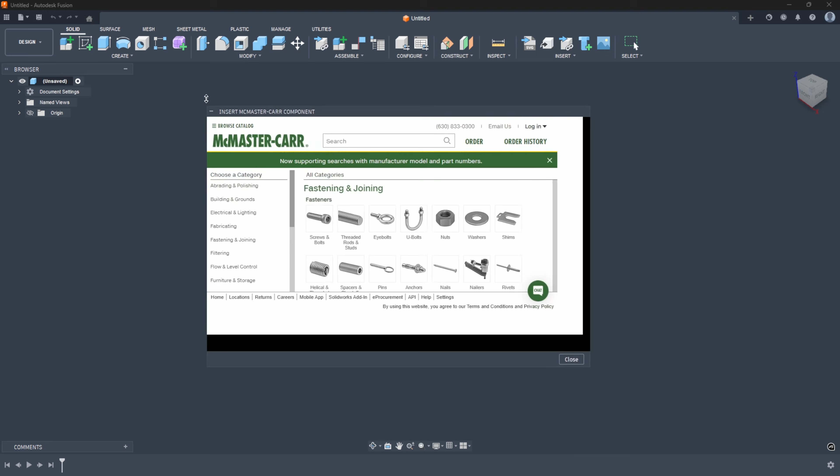I'll make this a little bit larger and do a search for 80/20. Let's do the double framing rail, and let's do a 3-inch rail height. Now as I scroll down, I'm just going to pick this first one here, this hollow example. I only need one of them.

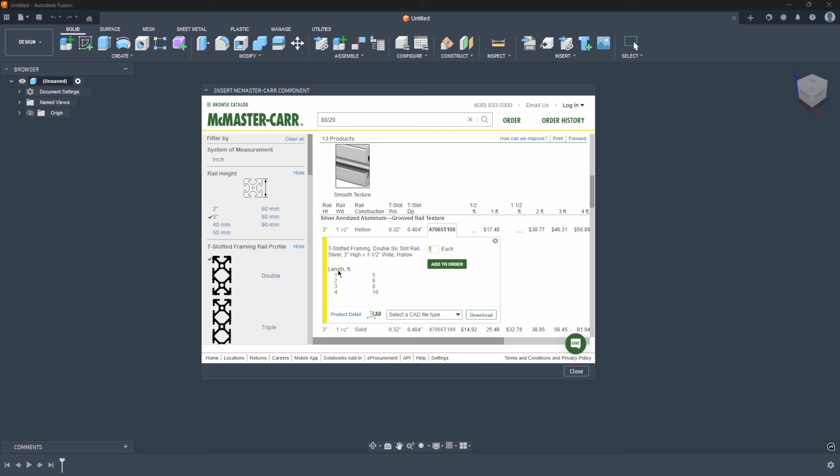Now you'll notice it's asking for a length. I'm going to scroll down a little bit, select a CAD file type, and it says please specify a length to download the CAD file. It only gives me different lengths in feet, and the shortest one is 1 foot, so I'm going to select 1 foot. I like to use 3D Step, and I'll say download.

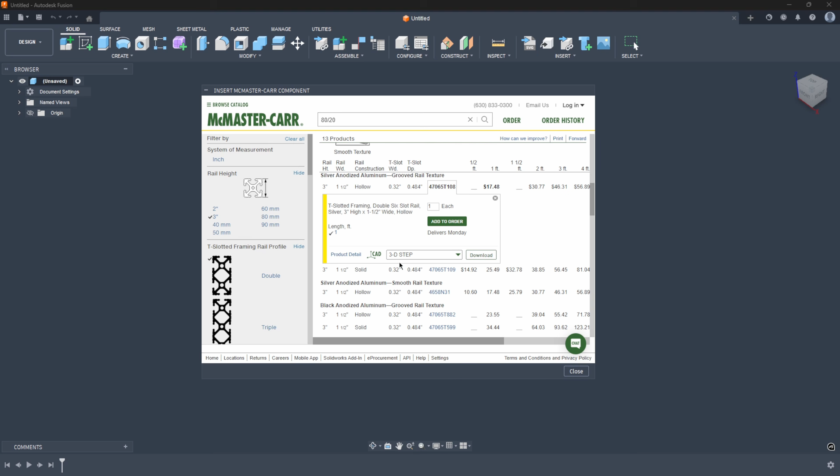I just got the 80/20 aluminum extrusion brought right into Fusion. I'll turn off ground to parent, I don't need that for now. I'll say OK, and if I click on one of these edges, we can verify that sure enough it is 12 inches in length.

Now, what if I wanted this to be a different length, some random length like 22.5 inches, which obviously was not an option in the McMaster-Carr dialog.

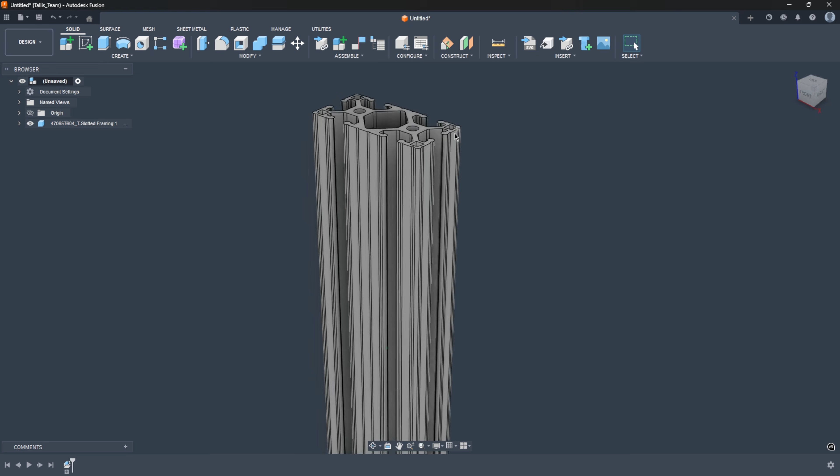Well, I'm going to click this top face here and say press pull. Or I could come under modify and say offset face - it's going to give me the exact same result. If I say press pull, you'll notice it says offset face.

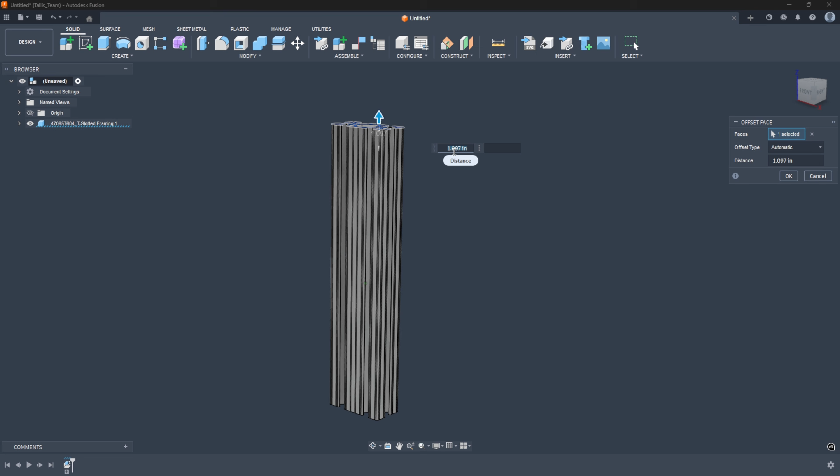Now if I start to drag, you'll notice it's giving me this number. It's kind of hard to see, but you'll see this white arrow, showing that it's moved just over an inch from where this arrow tip is. So this is where the blue face originally was, and we've offset it just over an inch.

Well, there's a cool little option where these 3 little dots are right here. If I click on these 3 little dots, there's a command in here called re-anchor. So I'm going to click on re-anchor.

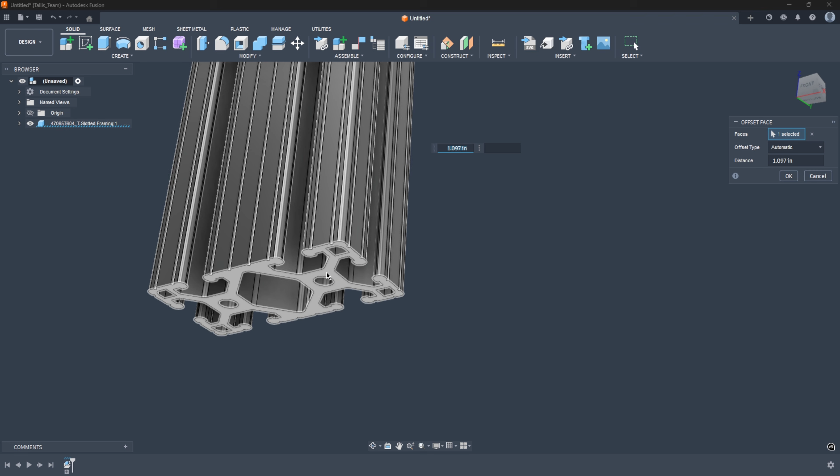And then I'm going to pick the bottom face of this extrusion. You'll notice it says select perpendicular face for re-anchoring. So I'm going to click that face, and now this number, instead of being 1, it's like 13. The arrowhead is now pointing to that bottom face, so it's measuring from the bottom of the part, and now the top blue face is 13 inches from the bottom.

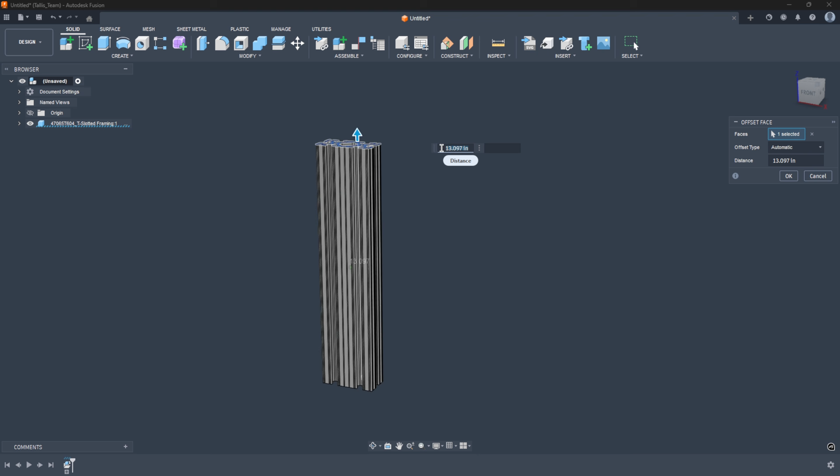So now I could type in, for example, I'm going to zoom out just a little bit, I could say 22.5, and I'll say OK. If I click on one of these edges, we can verify that sure enough the length of this beam is now 22.5 inches.

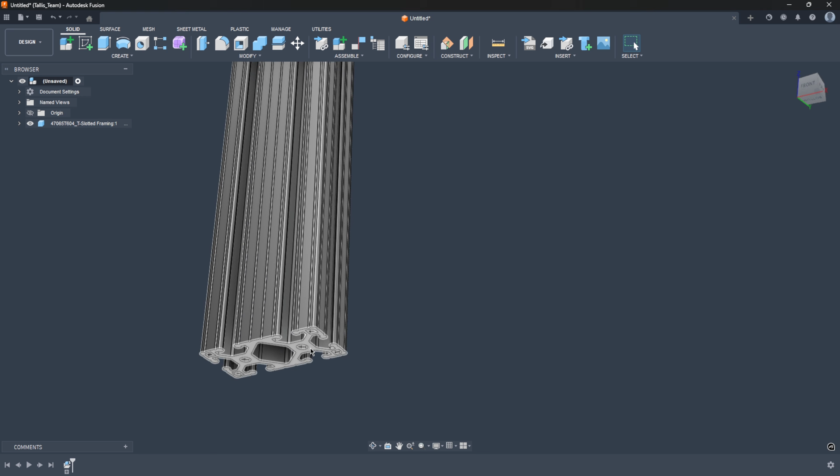So all we did was basically re-reference - we said measure from the bottom of this part and offset from the bottom 22.5 inches. Okay, so that's kind of the basics of the re-anchor command.

So I'm going to continue building the frame, and we're going to use re-anchor again here in a little bit. I now have the overall height, and I want to maybe create kind of like a square frame. I could re-insert in the McMaster-Carr, but I would have to go through all those filters again and search for it and tell it that I want the 3-inch and then I want it 12 inches long, etc.

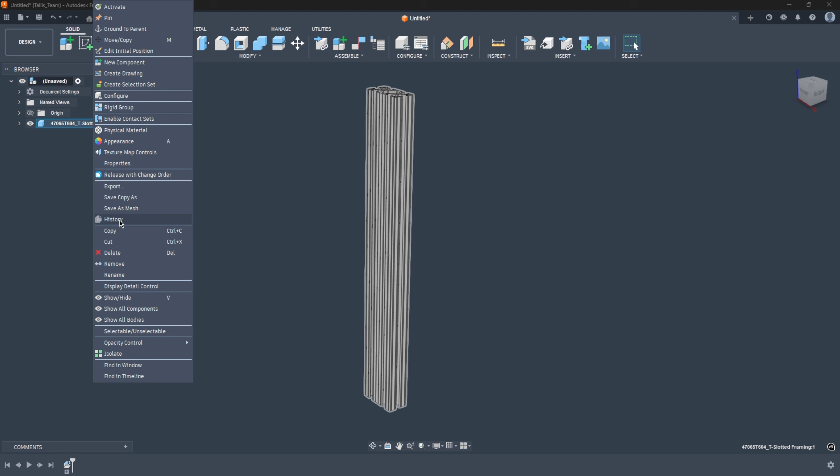Instead, I'm just going to copy this existing piece. Now here is a tip that I'm going to share with you. I just said copy. If I right-click at the top level and say paste, I'm going to get this result. I'm going to move that over.

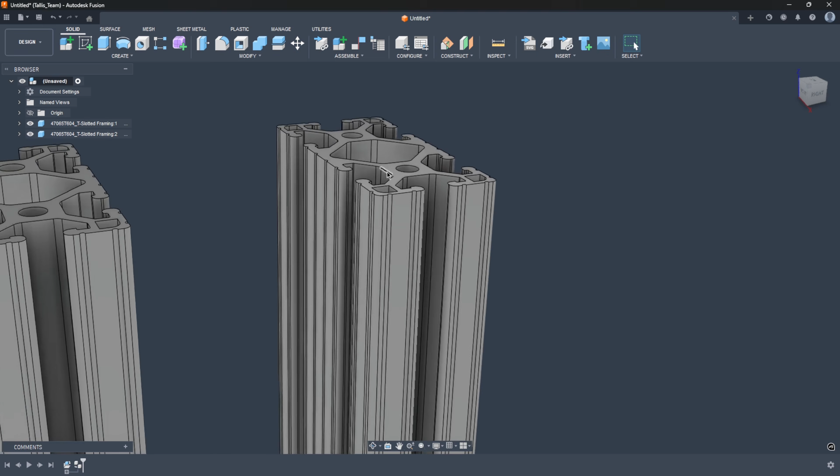But if I try and offset this face, if I say press pull, you'll notice that it actually changes both of them, and I do not want it to change both of them. So I'm going to undo, and I'll right-click, and instead of saying paste, I'm going to say paste new.

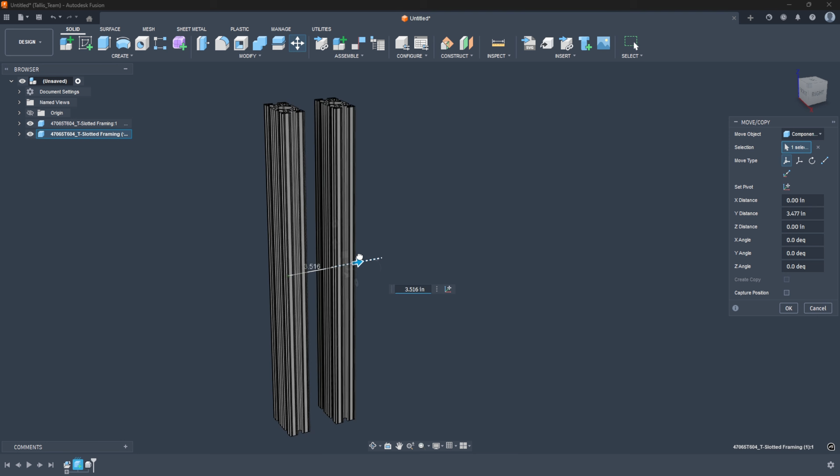And what this does is it pastes a new copy that's not linked to the original one. So I'm going to go ahead and rotate this, and I'll just move this over a little bit like so.

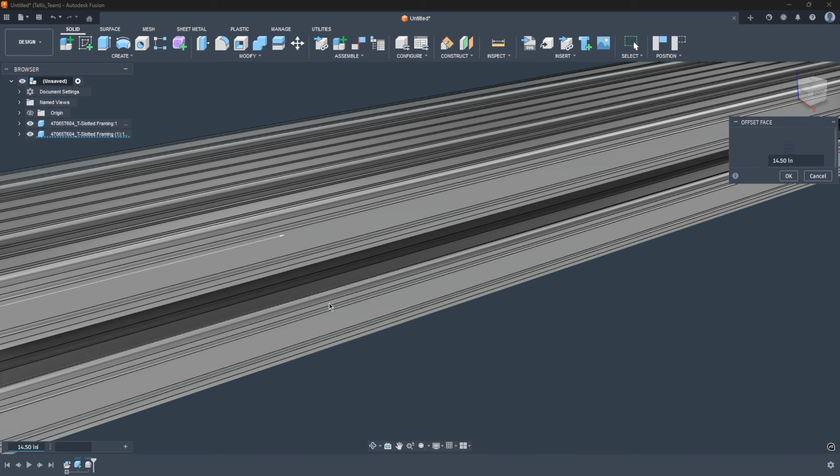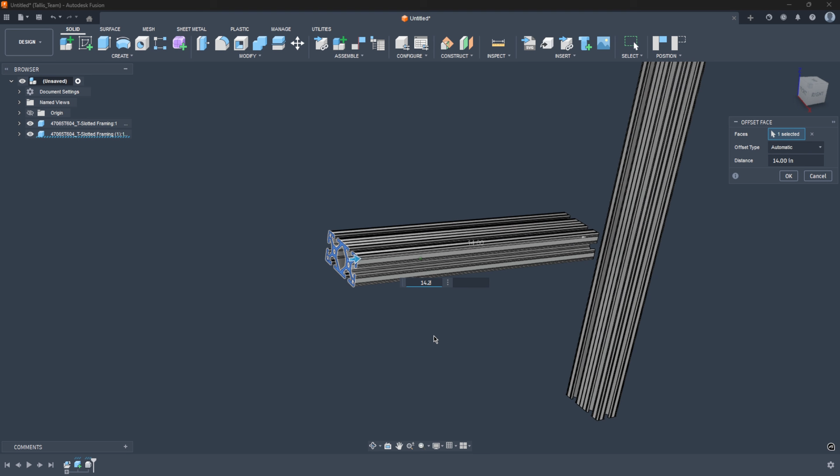And I'll do the same thing. I'll click on this face, press pull, and you'll notice as I move this, it's not affecting that other beam. But I want to set this to be a very specific length. So I'll say re-anchor, pick this back face, and say I want this to be 14.25 inches in length. Now if I click on one of these edges, I can verify that is 14.25 inches in length. That's really the power behind the re-anchor command.

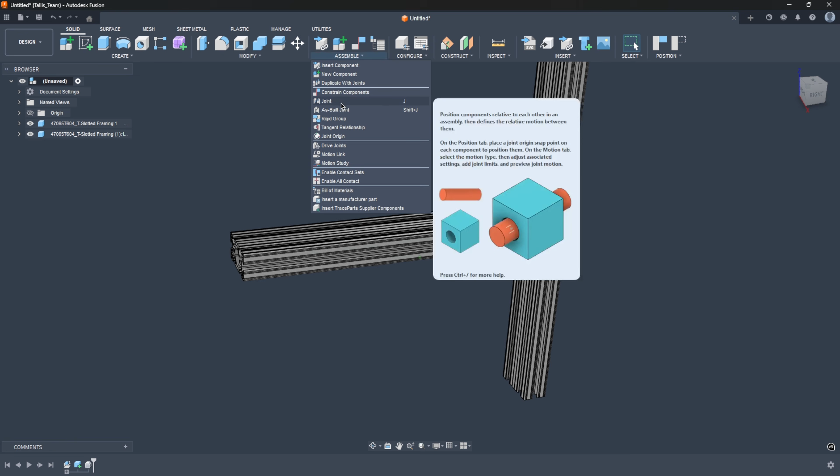I'll throw a couple more tips in here to make this video more interesting. I want to position this beam here next to this beam here, and this is where Constrain Components really shines. If I were to use the joint command, because there's lots of curves and stuff on here, it would be a little bit difficult to align this beam with this beam.

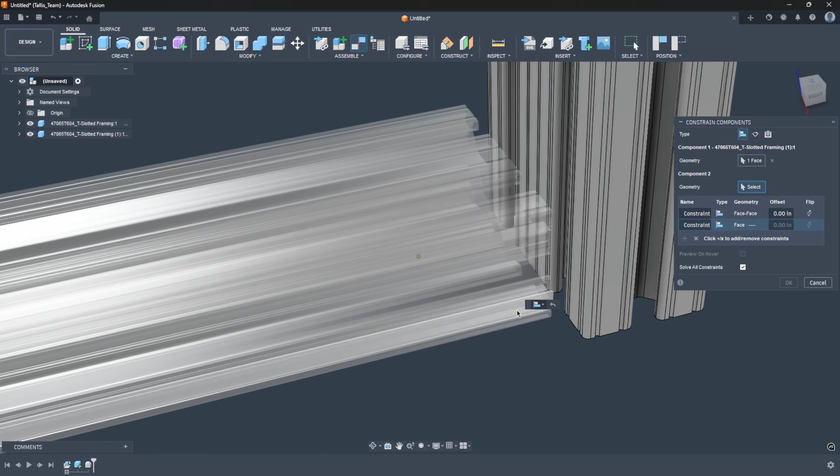But with Constrain Components, check out how powerful this is. I could say line up that face with one of these flat faces here. I'll add another constraint and say that flat face line up with that flat face there. Now you can see how those line up. Finally, I'll add a constraint and say that bottom face with that bottom face, and now they're rigidly connected together and perfectly lined up.

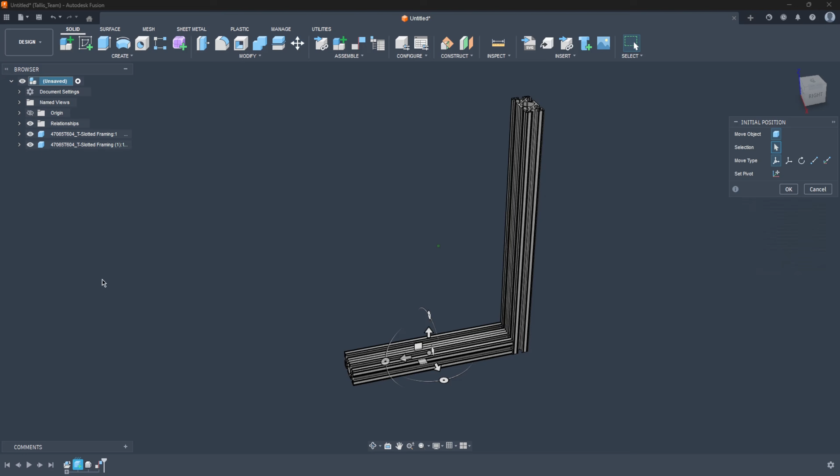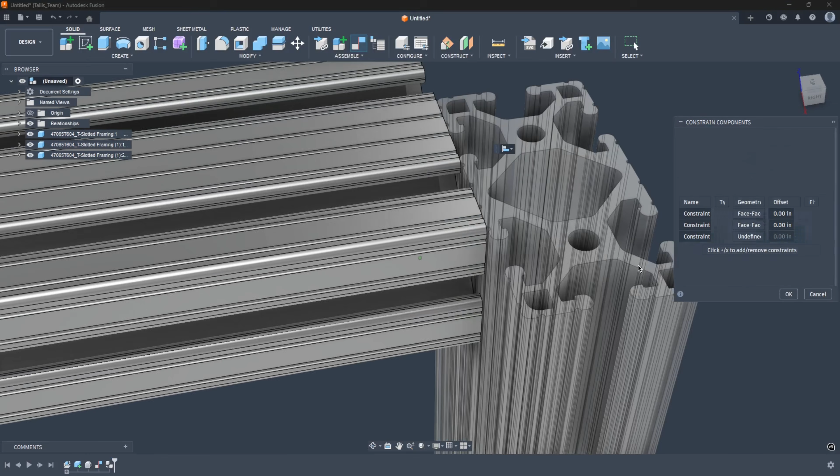I'll go ahead and copy that part. Now I can just come in here. In this case I want them to be the same, so I'll just say paste, I don't need to do a paste new. I'll bring that up and quickly constrain the components again, so I'll say that top face with that face there, this inside face with this outside face there, and maybe that face with that face.

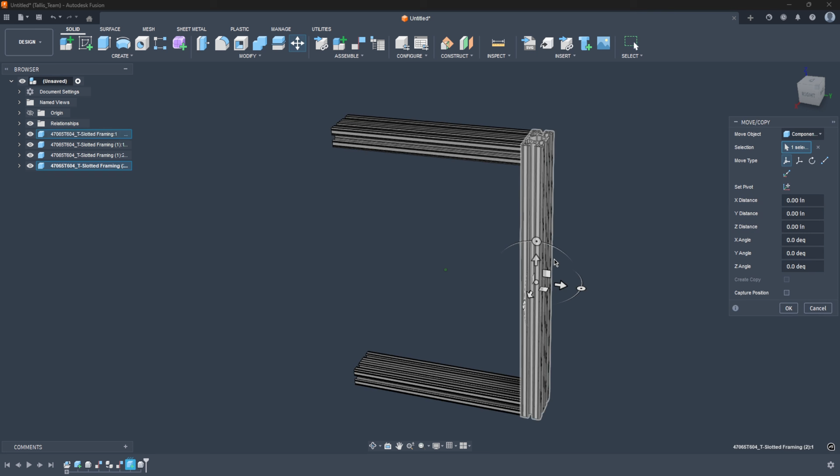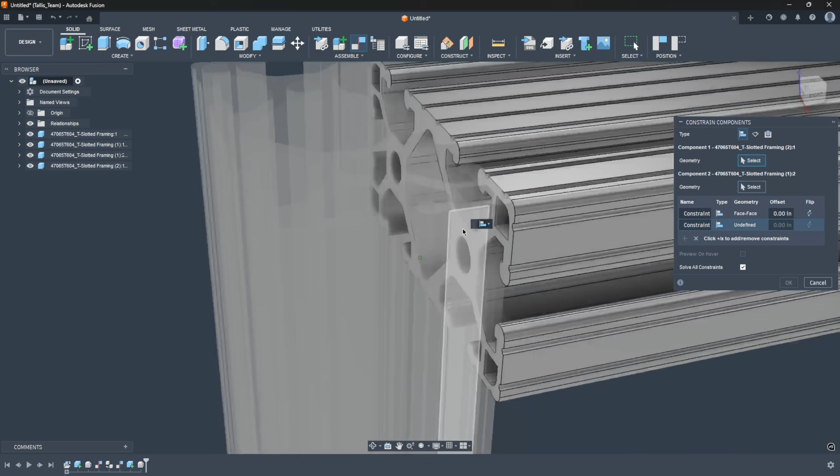And now we have this result. Lastly, I want to copy this frame here, so I'll say copy. Now I'm going to say paste new in this case. I'm going to bring that over because we're going to change the length here, and I don't want this copy to affect that copy, so I'm going to say paste new. Once again, really quickly, I'll just line these guys up fast. I do really like this new Constrain Components command inside of Fusion, it makes it really fast.

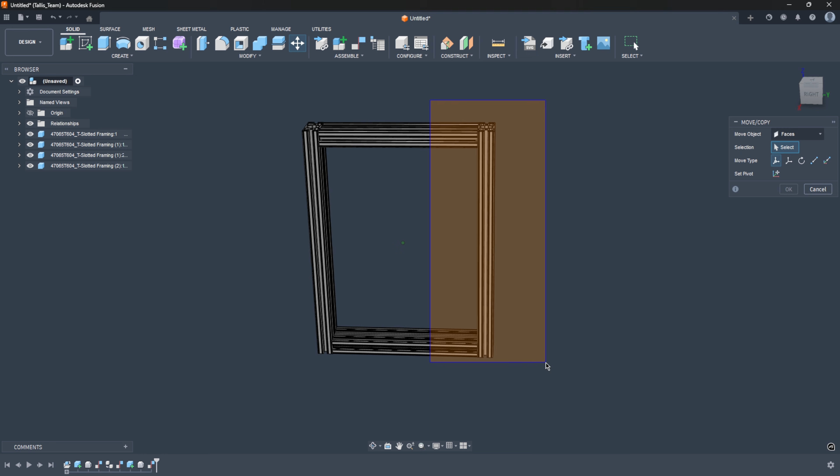Okay, so now we have this frame that's built together. Let's say I wanted to change the length of this. I could come in here and say move copy, and I want to make sure that my move object, which is usually defaulted to bodies, is set to faces instead. I could just draw a selection box that kind of covers over this whole right side of the frame.

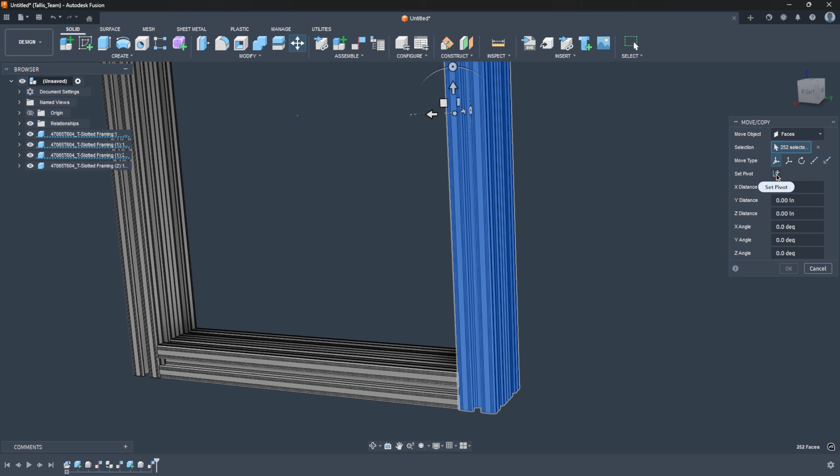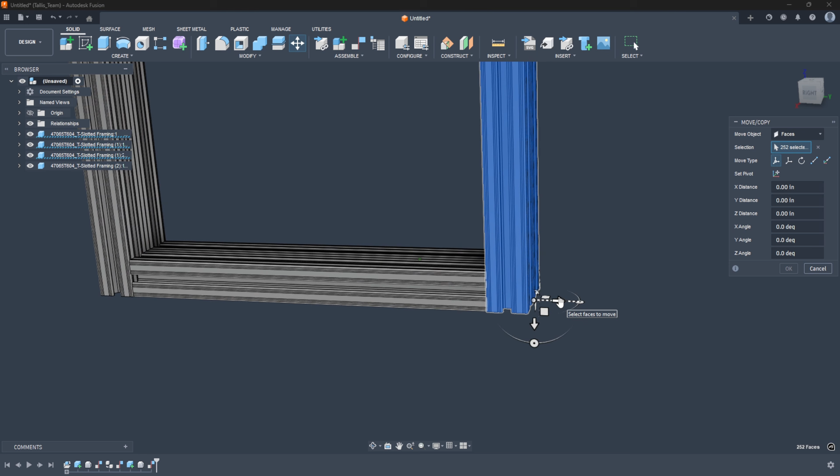And if I start to drag, notice where this blue dot is, that's kind of the reference or the pivot, and that doesn't make much sense. So I'm going to come over here and say set pivot, and I'm just going to pick maybe this point right here, on this front edge or on this front face. Then I'm going to click that green checkbox saying I'm done setting the pivot. So what I'm basically saying is measure from here, and when I start to drag, you can see that's where that arrow was measuring from.

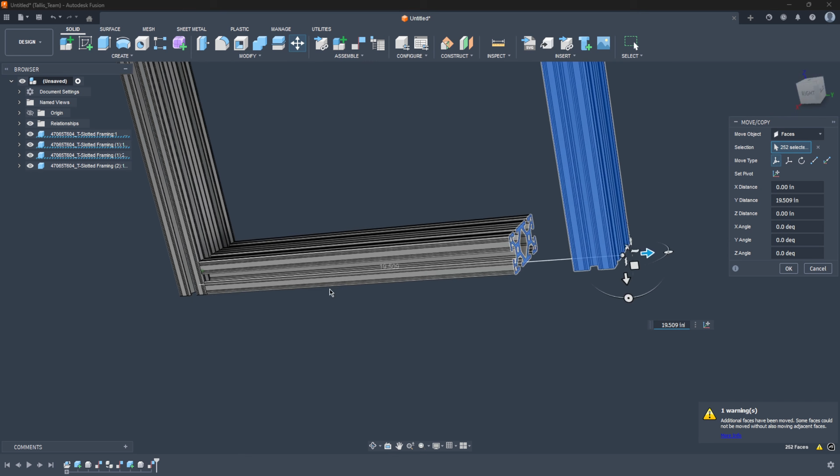Now we can come in and say re-anchor. Let's measure off the other side of the assembly, so way over here. You can see that the arrow is measuring from this side over here to this front face over here, and I can specify the total length. I want that to be 21.75. I'll say OK, and you can see that it moved all of the faces of this vertical beam.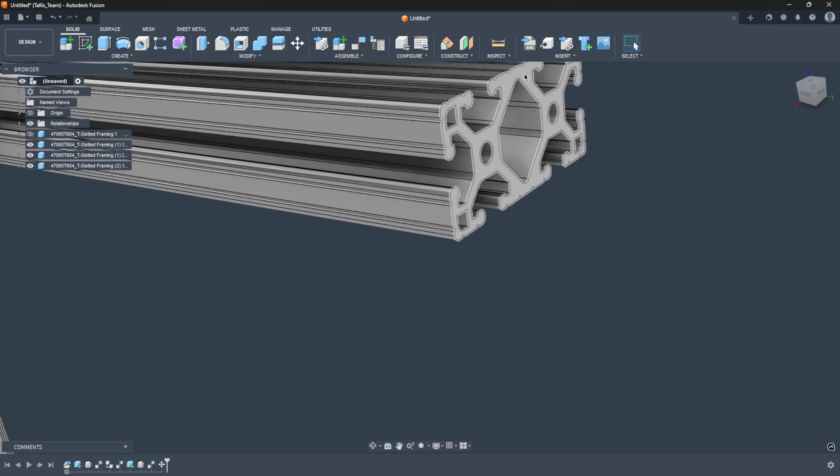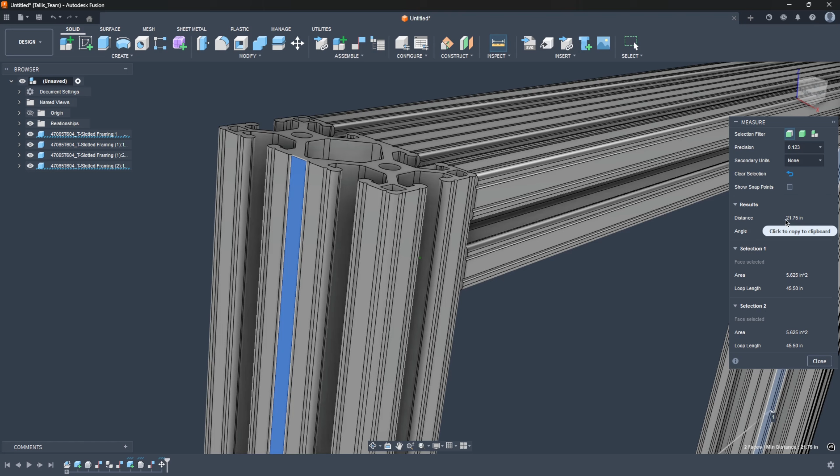It basically stretched or moved these faces to the right, and so these faces grew. That's kind of the cool thing with the move faces, it's almost like we basically stretched this whole thing apart. Now if we were to measure this, I'll measure from that face there to that face there. We can see that sure enough, it's 21.75. So that's the power of using the re-anchor command.